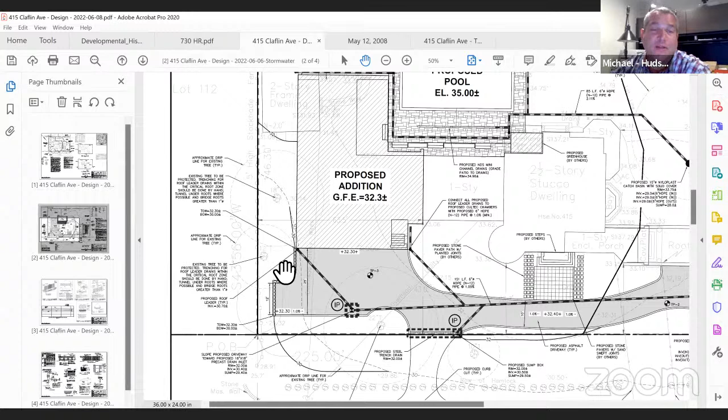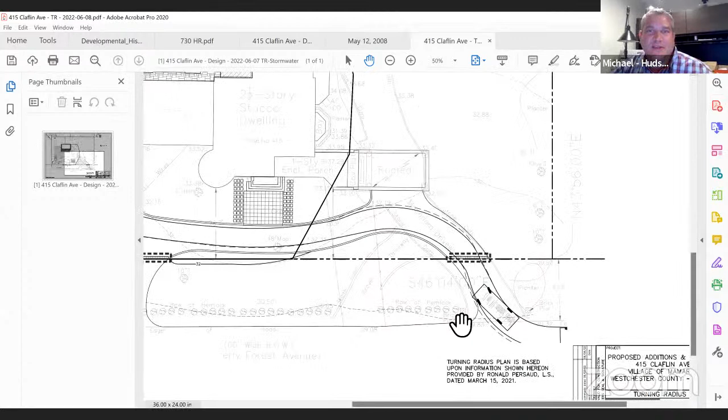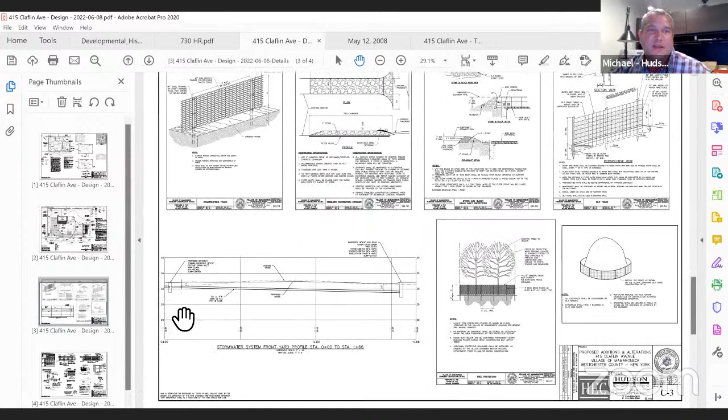One of the questions was about grading along this side of the garage. We had added retaining walls in this area to limit the amount of grading required for installation of the walls. There had also been some adjustments to the alignment of the driveway to make sure we had adequate space for turning radii. We submitted a turning radius analysis demonstrating the ability to pull into the garage as well as back out and drive back out of the driveway. I think the other issue was about adequate cover over top of the pipe to make sure we had adequate coverage for traffic to go over top of the drainage piping, which we had submitted. Basically we've gone through addressing all of Kellard Sessions' comments.

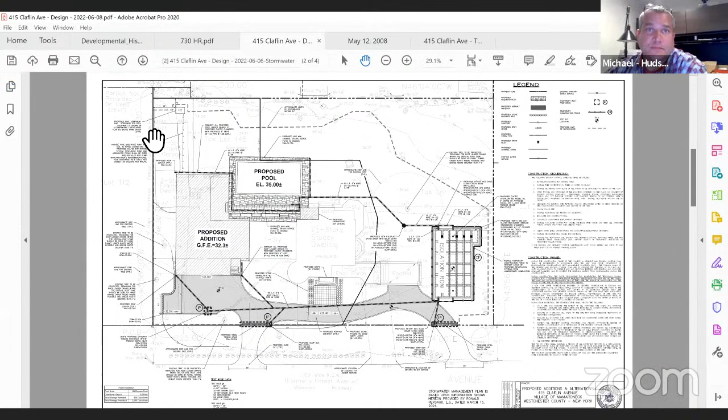I know some of them were last minute, but relatively minor. Anything else you want to highlight for us? Those were the primary changes. Again, we're designing for the 25-year storm, taking all the runoff from the addition and putting it into a new stormwater management system along the right side of the property, including drainage from the pool.

Ashley, AKRF, want to weigh in on anything with this one? So they did make some revisions to the plans in response to our comments, and all of our comments have been addressed. They were primarily about the pool and some of the information and where it was provided. So it seems our recommendation was to discuss the comments from Kellard Sessions and Susan Oakley because those seem to be more substantive. What about the lighting plan?

My notes say there was lighting, but I think originally lighting wasn't indicated on the plan. I've addressed that on the architectural drawings, which I can show you if you like. Well, maybe we should just walk through it a little bit. Things like lighting and sound tend to be things that the neighbors are interested in. I understand, so I can share my screen here.

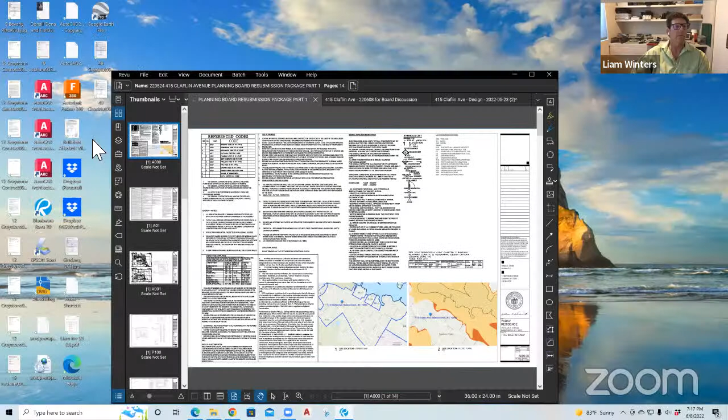Let's see here, is that working? Okay, let me just go quickly through all the drawings to the elevations I worked on. The side elevation here, everything we have is recessed, so you really can't see any of the interior lighting. Same on this elevation. On the rear elevation and the front elevation at the bottom here, we have can lights. Basically they shine up and shine down, but you cannot see the bulbs on them.

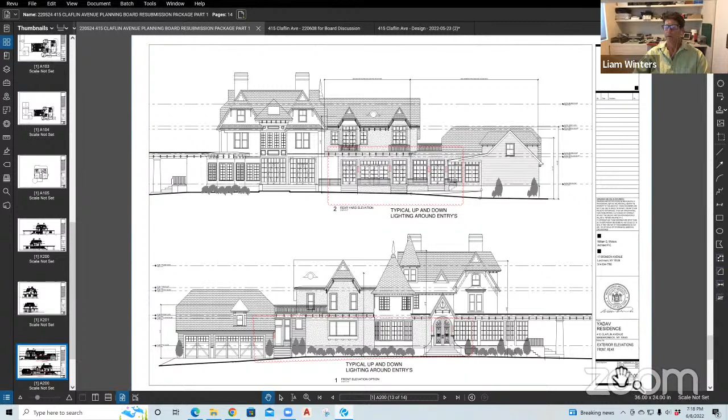I have a cut sheet, so there's one on either side of the front door, one on the side of the entry to the mudroom, and then on the back side facing the pool area, same thing in between all of these doors and windows. And at the pool itself? At the pool itself, there are going to be low-level downlights just around the pathways for walking.

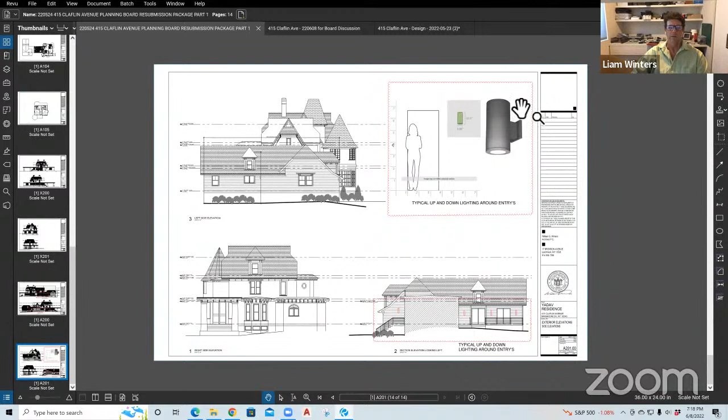And Vic, are you putting lights in the pool? Well, when he's ready, I can show him. Upper right-hand corner here is the type of light we'd be using. Right there. In the pool, we're going to put two lights in the pool on either end, but they're going to be inside the pool. We don't have any wall, like a parapet, or any light columns around the pool. It's just going to be shrubbery.

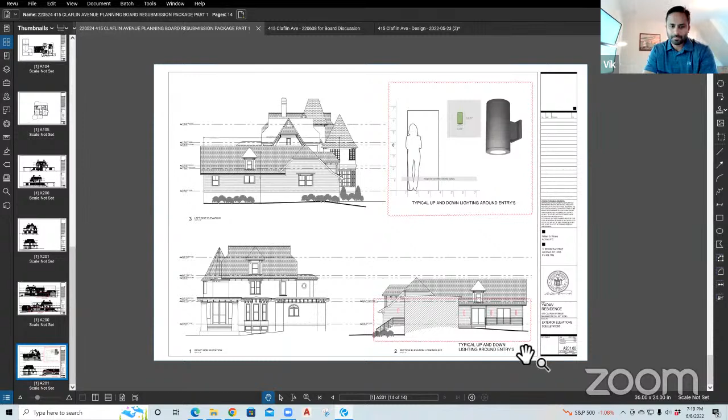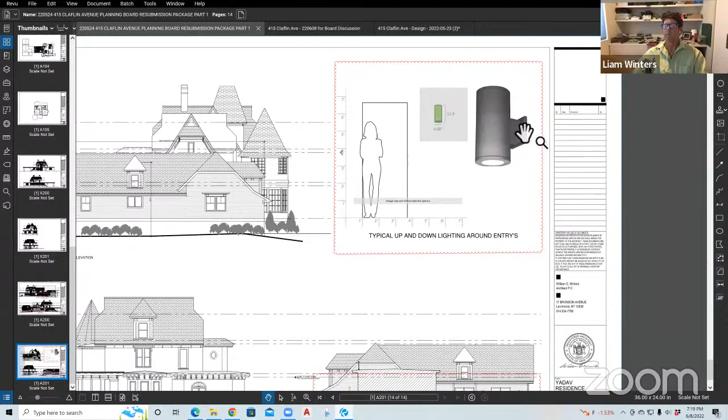So as you can see here, here's the end of the pool at the guest space. These right here are under overhangs, so they're going to shine up. And this is the unit that we're going to use, that size. You can see it a little better. They're about 5 by 12.5 inches. Okay, anybody? Okay.

John, I know you have some comments. We got a memo from you dated, updated on June 3rd, so we won't go over the comments. I think Susan's, we have a memo from Susan as well. So let's try to walk us through some of your concerns.

Sure. The major change in the site plan since the last meeting was changing the driveway in front of the house from gravel to asphalt. And with that, Michael designed a stormwater system that would collect that water and transport it to the infiltration system. He's expanded the infiltration system from 15 units to, I believe it was 31 units. So he's almost doubled the size of the system.

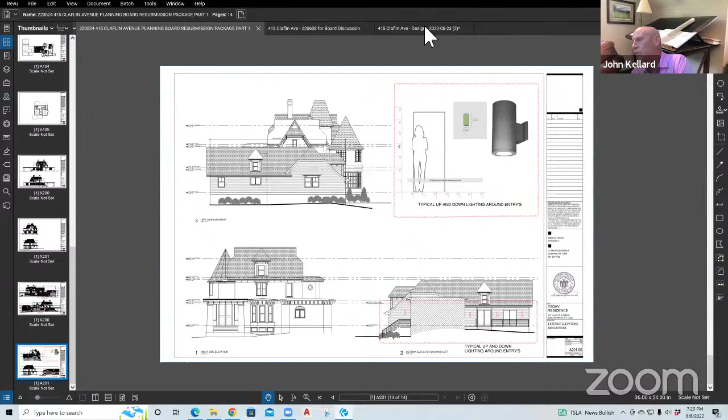During our review, we came up with two main comments. One, we didn't feel there was sufficient cover over portions of the drainage system, and we knew it was critical because he had to jump through hoops to get the water from the garage over to the infiltration system. Second, because he was filling in the driveway area, that fill extended over the root system of 3 of the trees they're trying to save in the front and side yard. So those were our remaining comments.

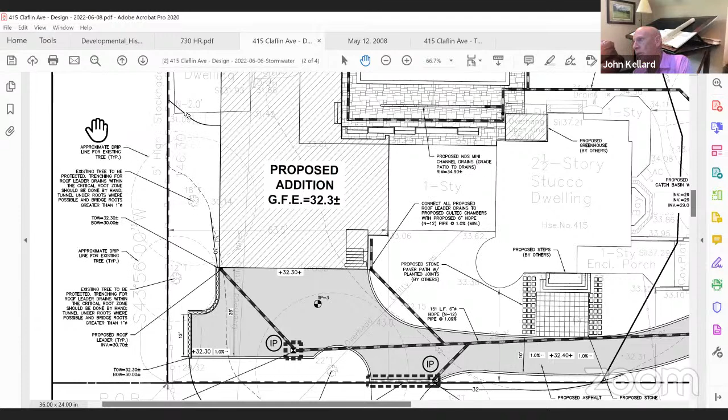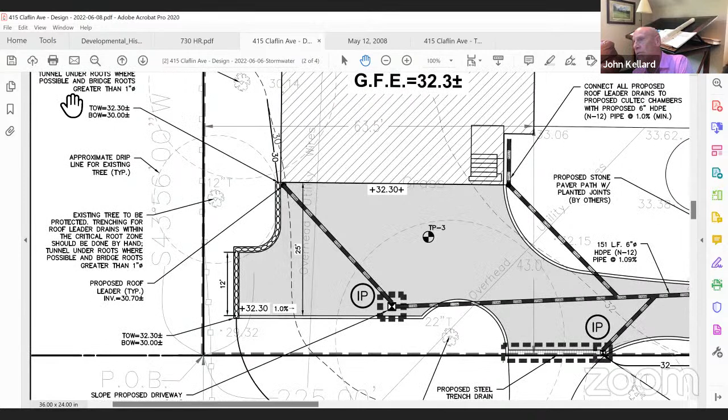What was the cover over the pipe and the fill over the trees? I believe this afternoon Mike's office sent us an updated set of plans, which now proposes, as Mike described before, small walls along the edge of the driveway so the fill will not extend over the root system of the trees. And he's provided a profile and grading of the driveway to show that he has adequate cover and can get the water over to the infiltration system to treat it.

Okay, so he has satisfied my comment. He just came in late today. They'll have to be reviewed by the rest of us who haven't seen them yet for a future meeting. My apologies, John, for the late submission. That's all right, I was glad to see last week's plans, right, okay.

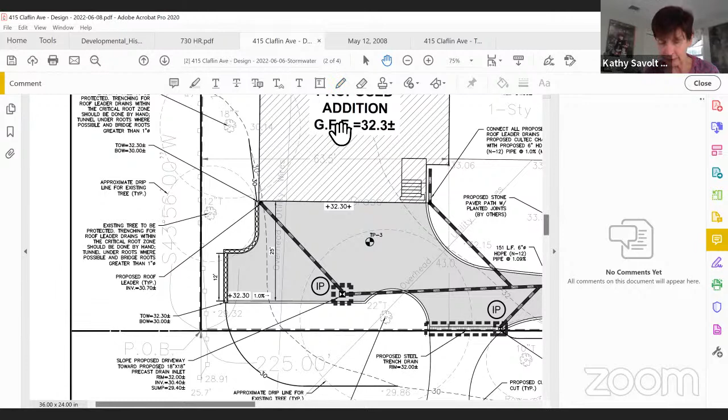All right, so you're addressing, and I think Susan's comments, I'll speak for her from her memo. She had concerns about covering up tree roots with fill, but also making sure the tree protection was proper for all the trees, that the tree preservation plan was complete, and that the tree protection information was shown on the drawings. So I'm assuming you saw that memo as well.

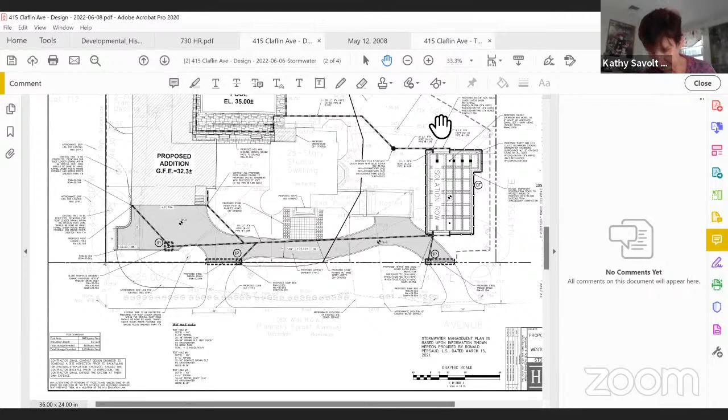I can share my screen to show the landscaping plan that we've added more detail to. Would you guys like to see that? Sure, it's easier for the public then, if anybody's watching a video of this, it's easier for them to follow along if you share the screen.

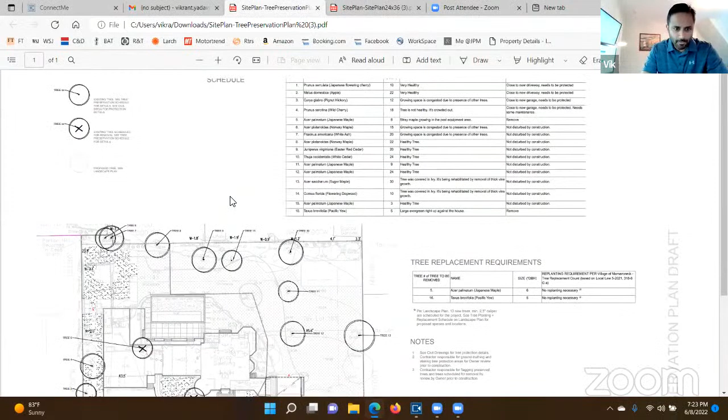Yeah, let me see if I can share it. Do you guys see this? Do you see my screen? You're gonna have to make it a little larger than that if possible, the print is a little small. Yes, okay, see a bit better.

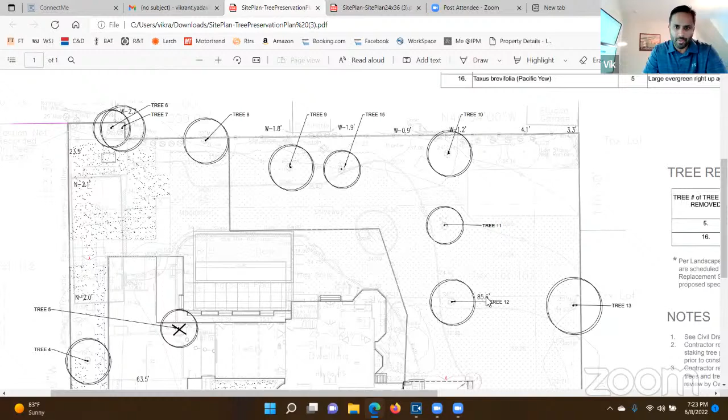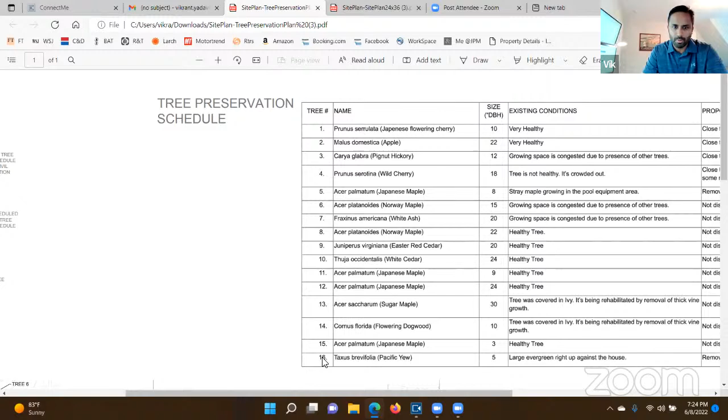So there's a few points for the landscaping. One was a tree inventory. This highlights all the existing trees that have been clearly marked, and the landscape designer has taken the full inventory of all 16 trees on the plot, and we detail the current condition, which ones are going to be affected and which ones we're preserving.

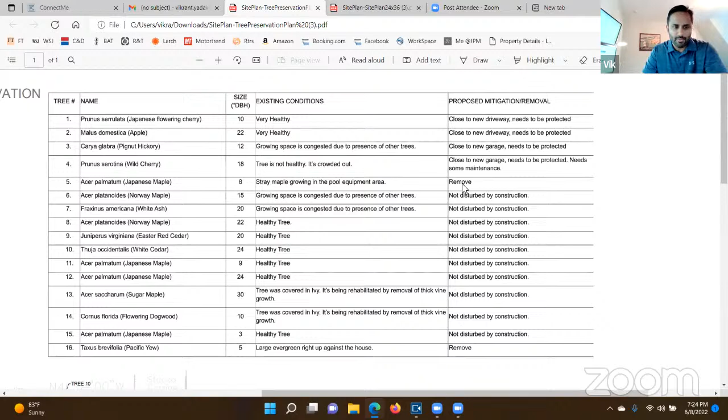There are two that we're going to remove, number 5 and number 16, and I'll show you where they exist on the land. There's one here which is, I believe, an 8-inch diameter tree, and this one here is a 5-inch yew. These two are going to be impacted, we're going to remove them. The rest of them we're preserving.

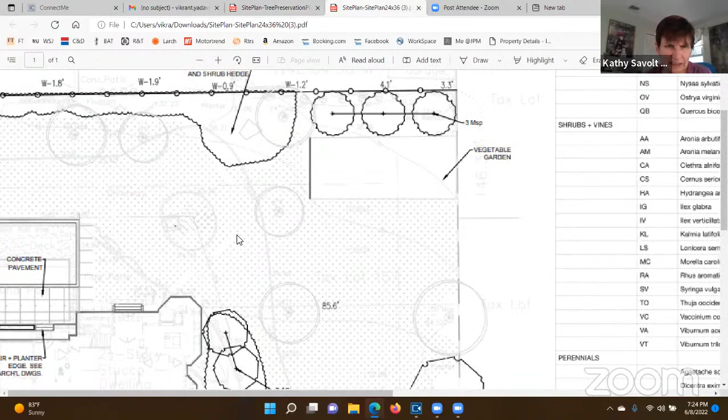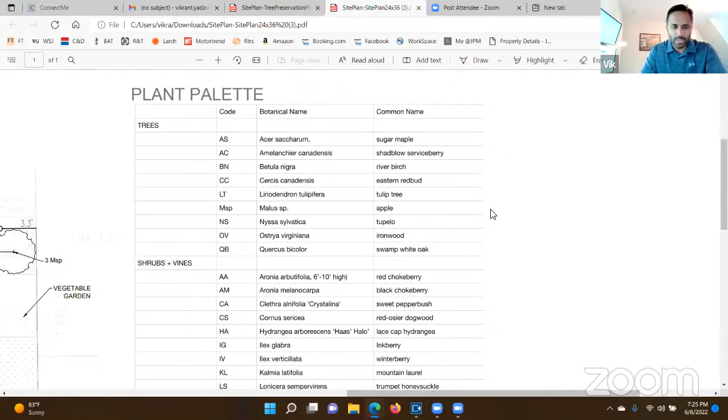Then the planting, this is the new layout where we're showing what we're planting. As per town guidelines, the 2 trees we are removing are sub-12-inch, so they do not need to be replaced. But we are putting in 13 new trees, which we're showing here, all 2.5-inch or more. So we don't need to replace the 2 trees we're removing, but we're adding 13 new trees, shown in this plan here.

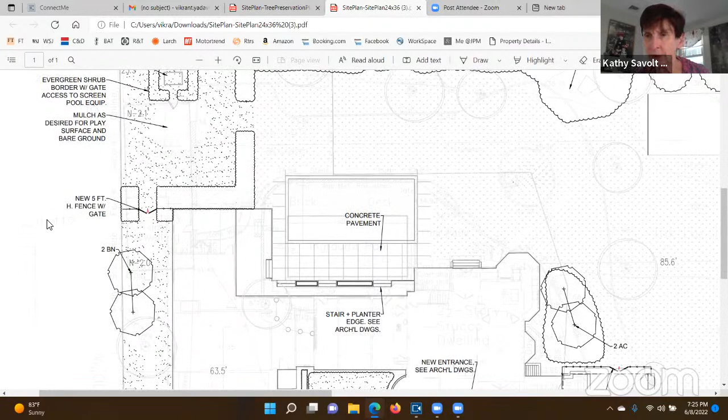Our landscape architect consultant noted that for the trees being removed, there's a discrepancy in the record. They're noted as 6-inch DBH in one part, and 8-inch DBH in another. Anything 8-inch or over needs to be replaced. Now you've got the replacement regardless of whether they're 6 or 8 inches, but it should be corrected so there's one number that applies, just so the record is clear about the size of the trees. That's one of the trees being removed—it could just be a typo, but correct it wherever it shows in the record, whether it's 6-inch or 8-inch.

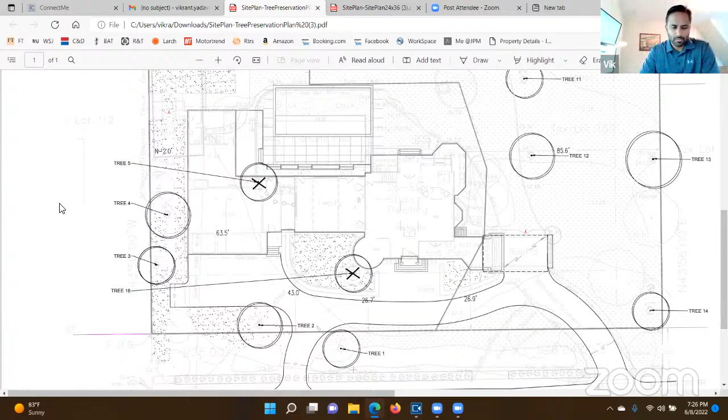Okay, but you have a copy of the memo? I don't need to read it. Yeah, no, I have it. It's posted on the village website for anybody who wants it. This was the first time we've had an application that needed to do a tree preservation plan under the new tree law. So you're the first. We've been enjoying the landscaping plans. Yeah, okay, happy to do it. Thank you.

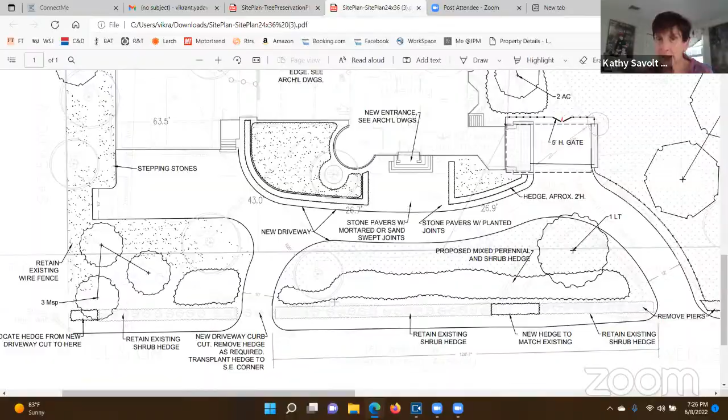Okay, any members of the planning board have any questions, comments, concerns? We obviously are going to have to come back with today's version of plans and make sure Susan's comments are addressed as well. Would anybody have anything else to add for the applicant?

No? No? Yes, Kathy, there was the merger of the two separate lots. Oh yes, the merger of the lots. How do we go about doing that?

So I've engaged a lawyer, and I think she's reached out to the village saying that she's working on it. I'll follow up with her where she stands in the process. Great, it has to be done separate and apart from what we're doing? Yeah, I think it's a separate process as far as I understand.

But knowing how this sort of thing can take time, we could do a resolution with a condition that the lots be merged within some period of time, I guess. Absolutely, no problem. I mean, I think we should assume that would be the case because we can't wait, no reason to hold this up waiting for that. Right, right, all right, that sounds like a plan.

Okay, it doesn't sound like we have anything major really to address. We were just talking before we came live that we don't have anything on the agenda for our next meeting, but it sounds like you all might be ready to come back to us since you already submitted some plans. But I would ask you just double check and make sure all the comments are addressed, and then if that's the case, we could probably put you on the agenda for the next meeting. Is that okay with everybody?